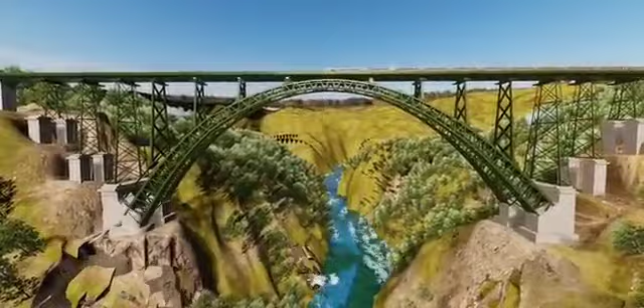Scale. Passengers might think that this would soon happen. What actually happens is different. The rail deck remains unaffected by the earthquake. Can you explain how this is possible?

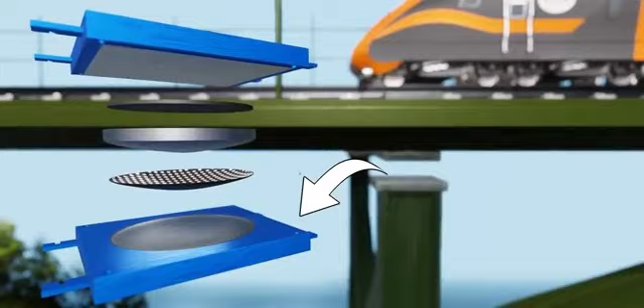The answer lies in the spherical bearings. The lower part of each bearing moves with the ground, but this motion does not transfer to the upper part. To isolate the rail deck, the Chenab bridge also makes use of expansion joints. The way expansion joints work is a feast for the eyes. The movement of the box-shaped rubber structure makes this functioning possible.

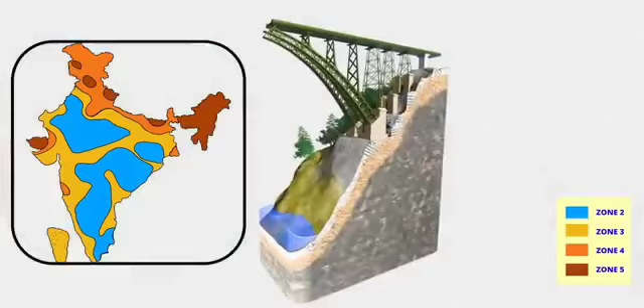To understand why this bridge is safe, even in a seismic zone 5 area, let's take a cross-section of its foundation. You can see a lot of interesting stuff here. This was the shape of the mountain before the construction work started here. An irregular, sloped mountain. The minimum slope of this mountain was 43 degrees, and the maximum was 77 degrees.

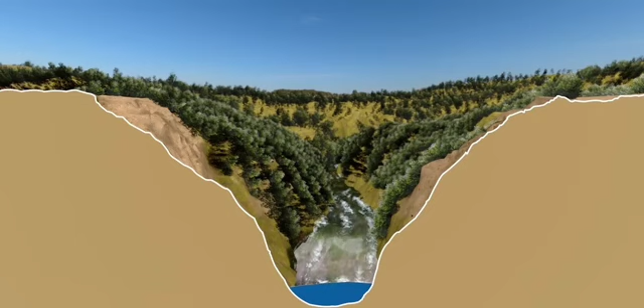The first job of engineers is to cut these mountains so that the shape is suitable for construction. The rocks in these mountains are not so strong. It's a material called dolomite. Not suitable for erecting a strong foundation. Excavators were used in the initial stage of shape correction.

After that, they employed a technique called pre-splitting. In pre-splitting, a lot of tiny explosives are kept at a close distance. Connect them together and they explode. Normal explosives break unnecessary portions of a rock. Using pre-splitting, you'll have greater control over the rock to be broken. The mountains look more clean now, but how to make them stable?

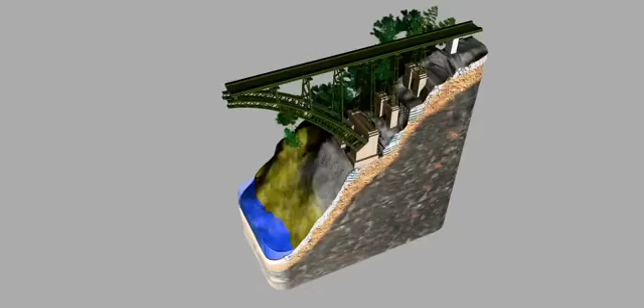The engineers used 3 methods to stabilize the slope: grouting, the use of anchor blocks, and shotcrete. The Himalayas are young mountains. The rocks in this region have a lot of minor cracks inside them. In the grouting technique, we inject cement into these voids. The cement acts as a glue and the rock becomes stronger.

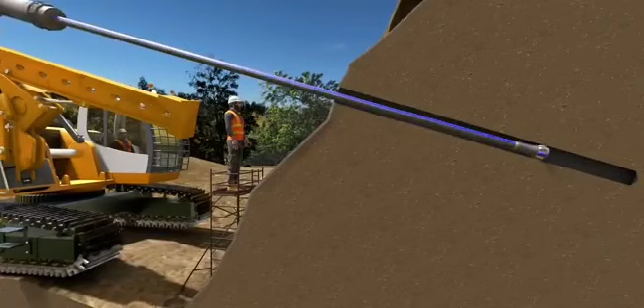You might have seen a lot of strange-looking blocks in construction photographs of Chenab Bridge. This is a smart slope stabilization technique called anchor block stabilization. In this method, the workers make holes on the slope. After that, they insert a special rod with a lot of tendons in it. In this project, they used Dywidag tie rods. Now it's time for grouting. Once the grout is hardened, a block is kept on the rod.

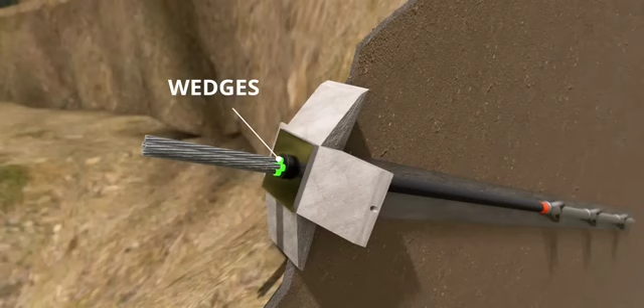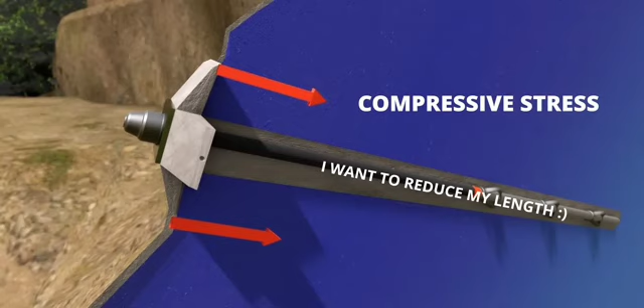Now comes the use of a powerful hydraulic jack. The hydraulic jack pulls and keeps the steel tendon in extreme tension. After that, using a wedge arrangement, the steel tendon is kept in tension, even if the hydraulic jack is removed. Now, can you predict the force produced by the concrete block? The steel tendon in tension wants to reduce its length, but the block is not allowing that. This means the concrete block will press the slope inward. This compressive force will greatly increase the stability of the slope.

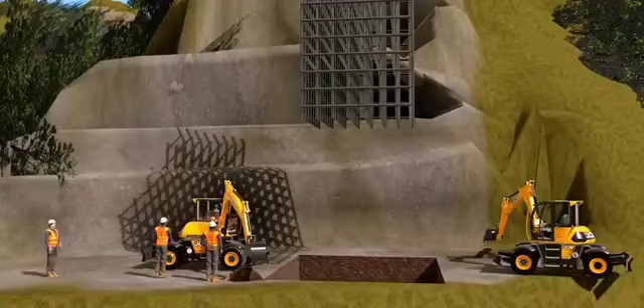Their next technique is shotcrete. Using this special machine, concrete is sprayed on the mountain rocks. This technique increases the stability of the mountain further. Now, the mountain is ready to support the heavy steel material. Next, they prepare the concrete foundation so that the steel piers of the bridge can be erected on it. Erection of the steel piers is done in a rather straightforward way.

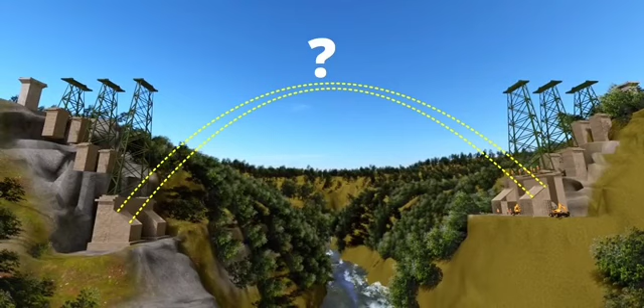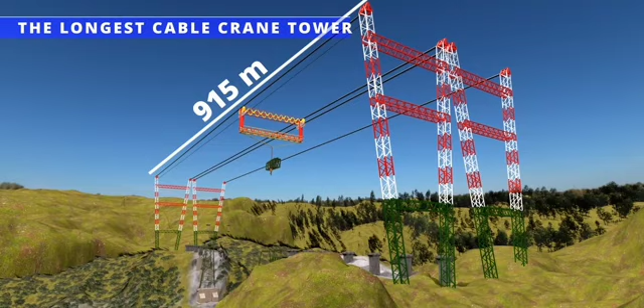But how to erect the arch? No crane in the world will be able to do this task. That's why the engineers first erected the longest cable crane tower in the world, with a span of 915 meters. This cable crane is capable of lifting up to 35 tons. All the structural elements needed for the bridge were transported via these cables.

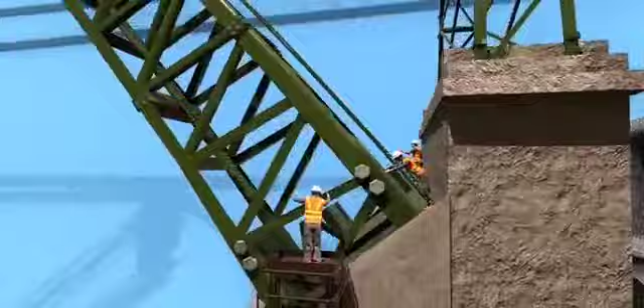Each arch segment is made up of box sections of 10 to 12 meters length. The different elements of the arch were connected together mainly using nuts and bolts. More than 600,000 nuts and bolts were required for this work. The arch construction is progressing in a step-by-step manner. During all these processes, you can see cable stays supporting both halves of the arches from the steel pier. Without these cables, you can guess what will happen to the arches. They'll fall down due to their own weight.

More interestingly, to balance the force on the first main pier, the cable stays were connected to the neighboring pier in the opposite direction. Without these stay cables, the main piers would bend inward. Now comes the crucial day, the completion of the arch erection. Both halves of the arches met on this day. This process is known as arch closure.

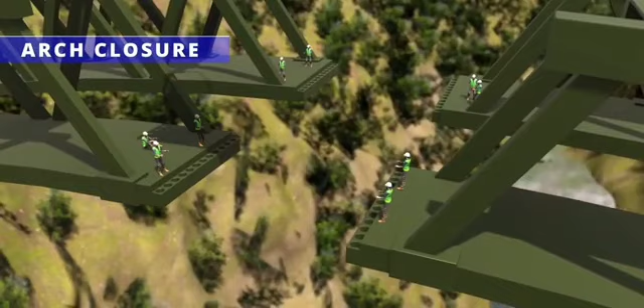The main issue in arch closure is that even minor alignment issues can make the final connection an impossible task for the workers. Even if the alignment is perfect, the heavy wind will make the assembly work difficult.

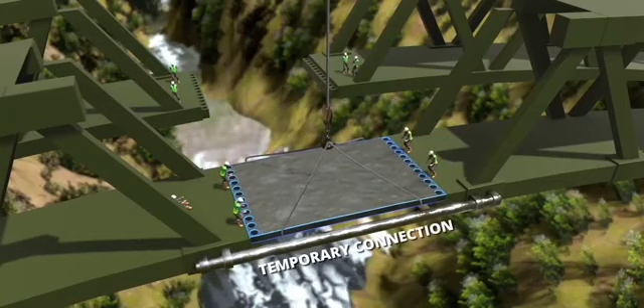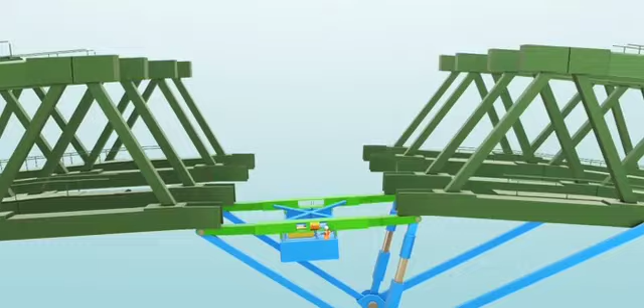So the first task before the structural element installation is to align both the halves perfectly, and also we need a temporary connection between them. This is why this special hydraulic jack is used. By adjusting the green member of the jack, the horizontal distance between the arches can be adjusted. You can see currently only 6 members are missing from the arch. The yellow portion helps in adjusting the vertical distance.

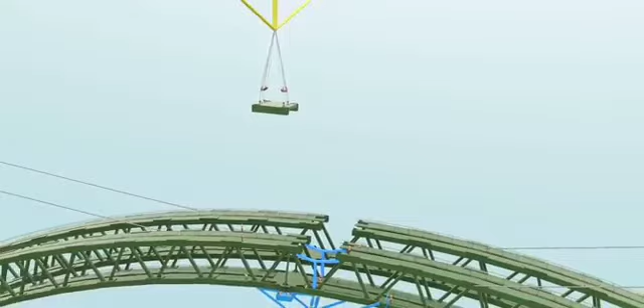The bottom chord can be fitted. Once this is done, the force in the green member of the jack can be released now, and a few more elements can be installed. Now they introduce the next jack. Until the perfect gap is achieved in the top chord, adjust this jack. Now, the top chord, the final structural element of the Chenab Bridge, is installed.

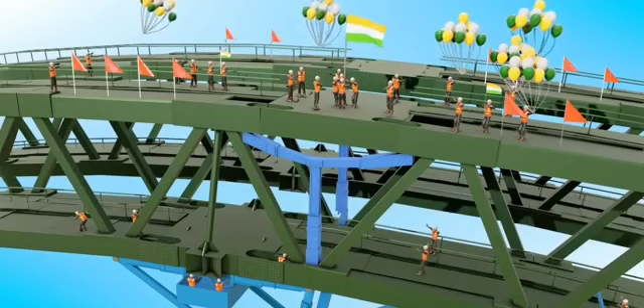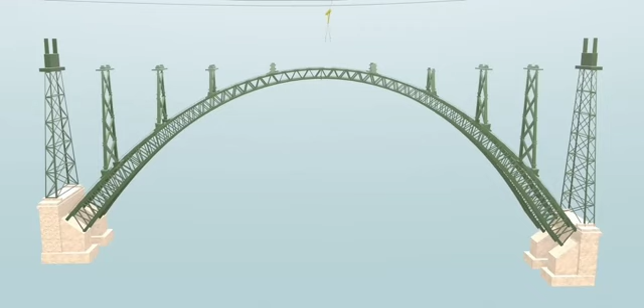This was a big celebration. Both arch halves got connected perfectly. The jacks have done their job. Once the arches are connected together, the support cables are no longer needed. The half arches support each other. They erected piers even above the arches. For the erection of the arch, the workers worked meticulously. Even their food was delivered by crane on the arch.

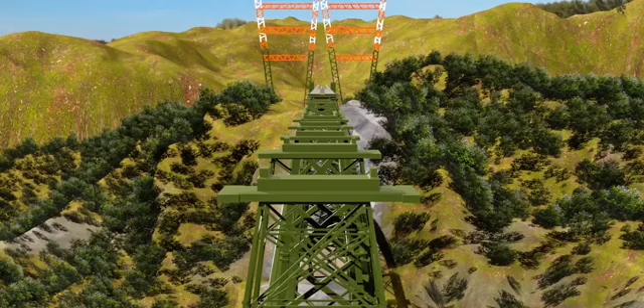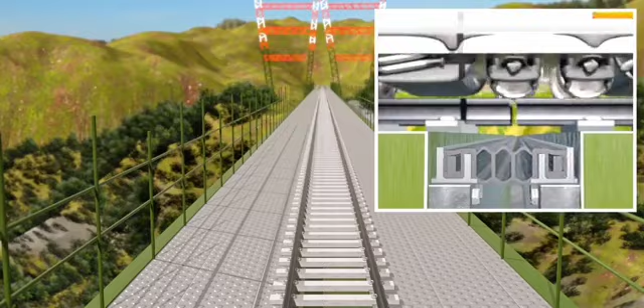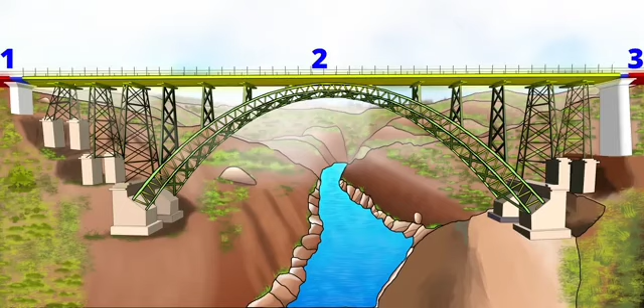The next stage of construction is the installation of decks. The rail track will be laid on this deck. We've already studied about the expansion joints of Chenab Bridge. The main span of Chenab Bridge uses 2 such expansion joints. The bridge is separated into 3 pieces with the help of these expansion joints. In short, the rail deck of the Chenab Bridge is not fixed to any structure from the ground. It's just floating on all these bearings.

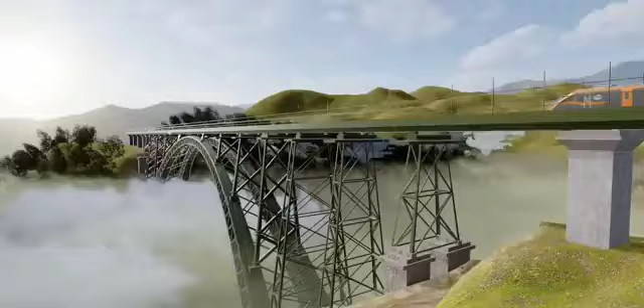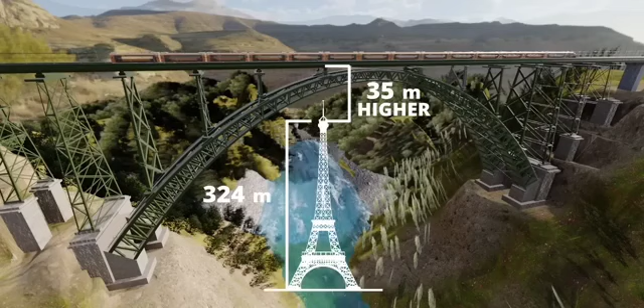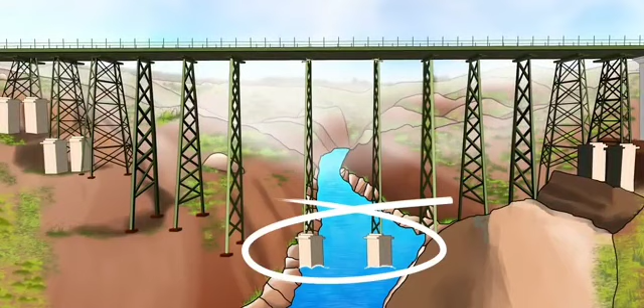All this sophisticated engineering, planning, and execution are the reason why the Chenab Bridge became the tallest rail bridge in the world. Its height is 359 meters above the Chenab River, 35 meters taller than the Eiffel Tower. You might have wondered why Chenab Bridge uses the arch bridge technology. Why not a simple pillar bridge? Look at the height of the pillars needed in this case. This would also obstruct the river flow below.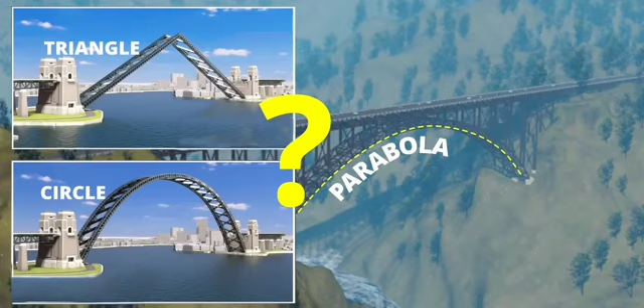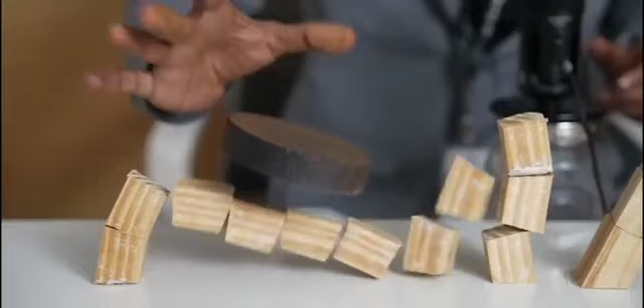The arch shape in an arch bridge is always a parabola. Why not any other shape? To get the answer for this, let's do an experiment. Parabolic versus a circular arch. When I keep a weight on the circular arch, now let's keep the same weight on the parabolic arch. Wow, it is carrying the weight easily. Let's add one more weight. Perfect. It is even carrying an extra weight. So parabolic arch is obviously a super strong shape.

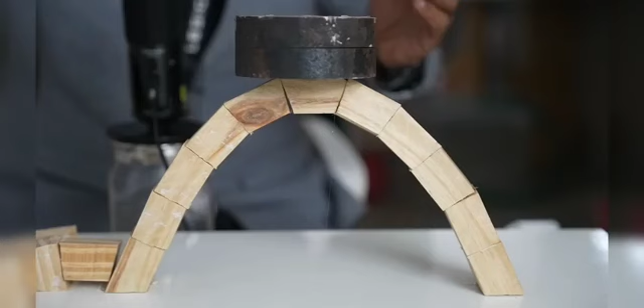Now it's time to prove logically why parabolic arch is the best self-supporting structure. Let's tie a gigantic chain across the mountains of the Chenab. Thank you, King Kong, for your help. The shape this chain forms is a catenary. However, for simplification, we can approximate this shape as a parabola. Even if you try to hold it in some other shape, it won't stay there. A chain can support only a normal tension force.

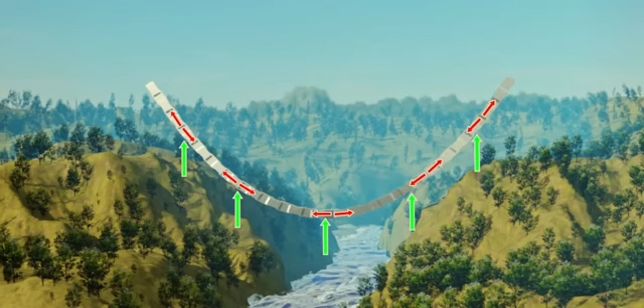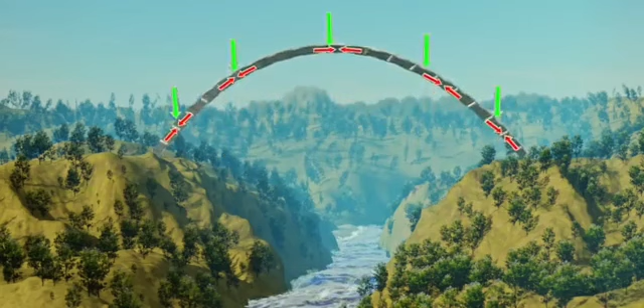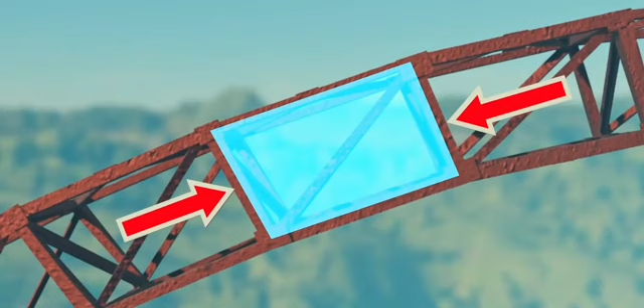Now the tricky part. Let's solidify this parabolic chain. Now let's flip the direction of the gravitational force. Since the external force has flipped its direction, the internal stress will also flip its direction and become purely compressive. Now just flip this entire arrangement. Wow! It becomes an exact arch bridge. The compressive force developed by this parabolic structure is exactly at the middle of the section. Such structures are always stable. You can see why a structure may not be stable when the forces do not have this quality. This is why the parabolic arch is the best self-supporting structure.

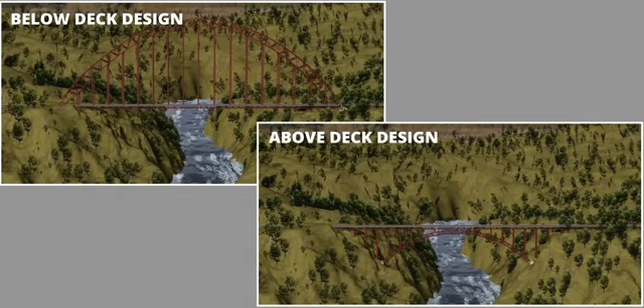Now let's construct a road deck below this arch. This arch bridge is unnecessarily huge. There's one more way to achieve the same objective. Just shift the supporting arch down. Here again, the force induced in the arch is the same. If you were the chief engineer in charge of this project, which design would you choose? Obviously, the above-deck design, right? The reason is simple. You will save a ton on construction materials.

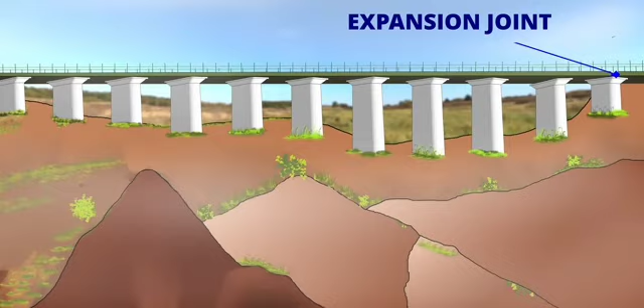So far, we've seen 2 expansion joints of Chenab Bridge. It should be noted that the bridge has one more expansion joint, but slightly away from the arch section. In short, the 3 expansion joints separate the bridge into 4 pieces. The bridge is even designed for redundancy. This means even if one of its piers gets damaged, the bridge will still remain stable. The train will still be able to cross the bridge, but at a maximum speed of 30 kilometers per hour.

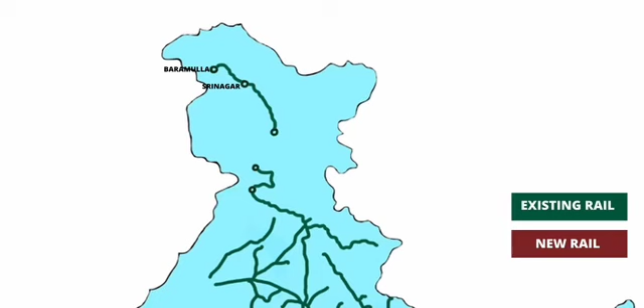Chenab Bridge is connecting the Kashmir Valley to the rest of India via rail link for the first time. Huge mountains, weak rock, inaccessible terrain, heavy wind, and earthquake-prone area. Chenab Bridge project overcame all these hurdles and became the tallest rail bridge in the world.